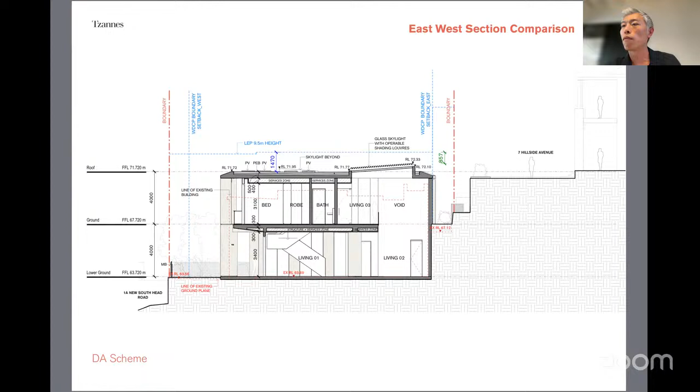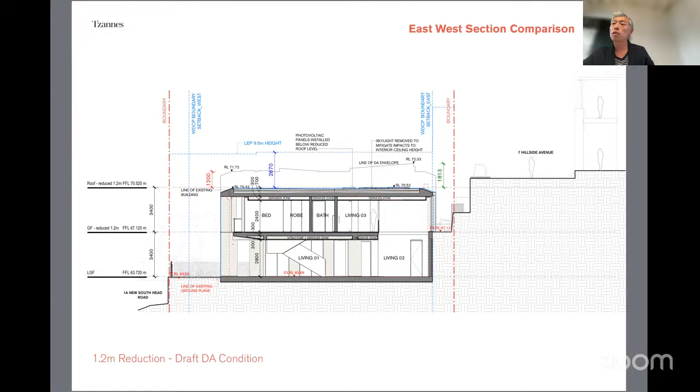I'll move on to the next section, which is the draft DA condition, reduces the height by 1200, also noting that this means reducing the skylight by 1800. We think this amenity reduction is unnecessary. It would compromise the quality of housing infrastructure, and adversely impact the overall quality and outcome of the architecture.

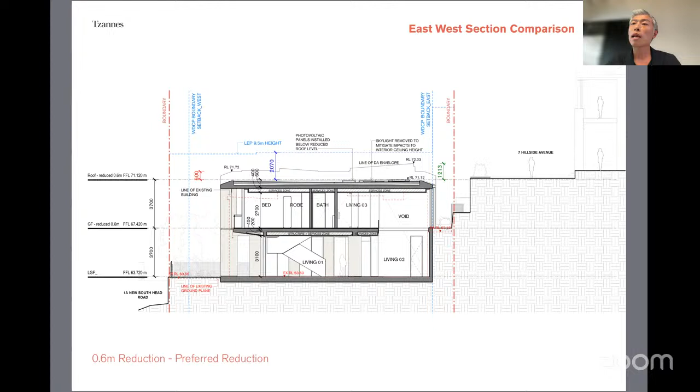So instead, we propose a more nuanced and balanced height reduction of 600 mil. This option will still be 2 meters under the LEP height. Here's a comparison starting from the LEP height, followed by the DA scheme 600 mil reduction in green, draft condition 1200 reduction in blue, then the existing in red.

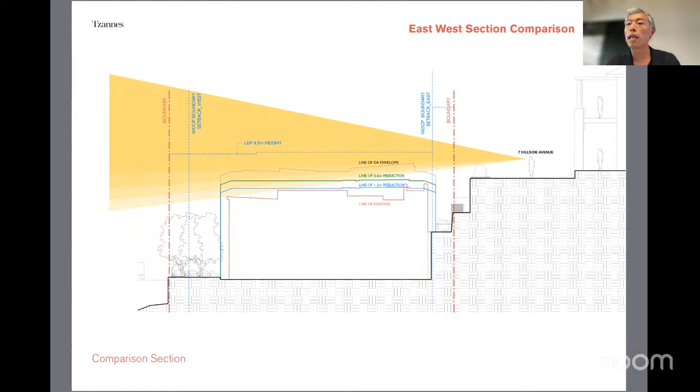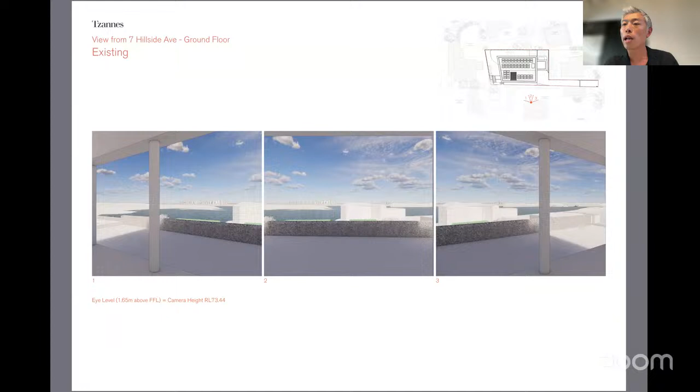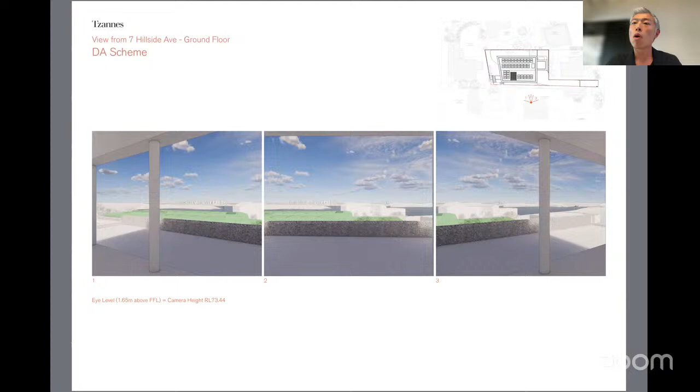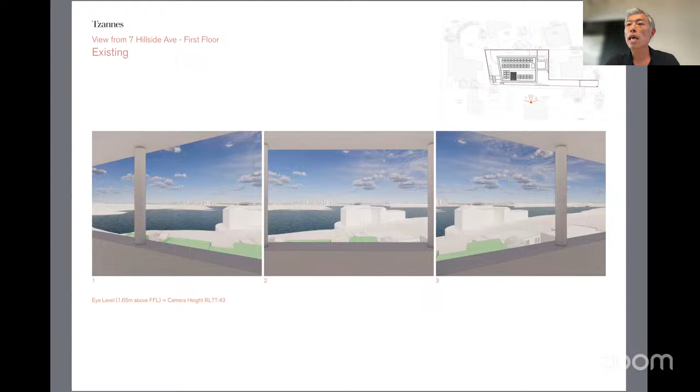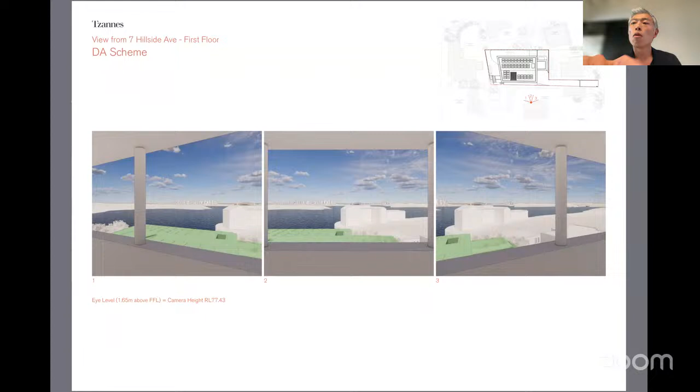We also did the same analysis standing on the first floor of number 7 Hillside Avenue, again existing, followed by the DCP LEP envelope, then the DA scheme, 1.2 meter reduction, and 600 mil reduction next.

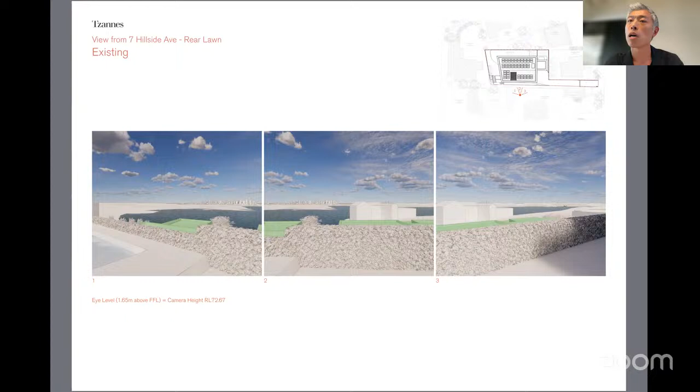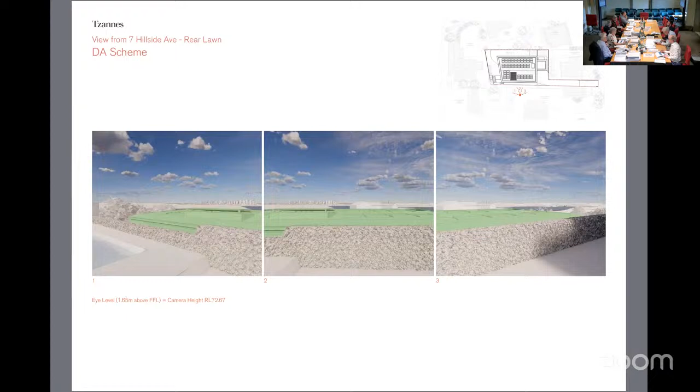And lastly, we also did an analysis standing on the rear lawn of number 7 Hillside Avenue, approximately matching the photo submitted as part of the objection. Again here we see the existing, followed by the LEP DCP envelope, then the DA scheme, 1.2 meter reduction, 600 mil reduction.

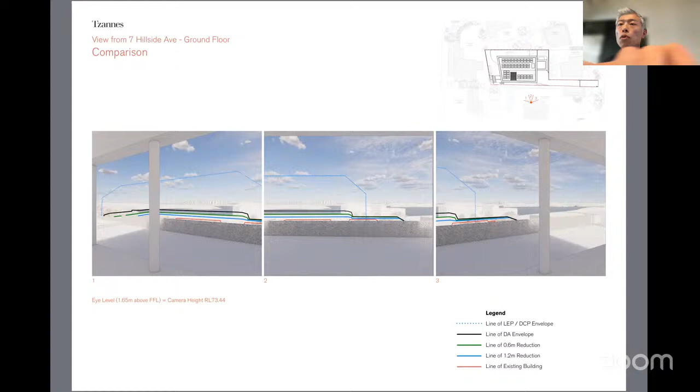Last but not least, these show the comparison of the varying height with the preferred 600 mil reduction shown in green. This is standing on the ground floor. This one is standing on level 1, number 7. And this one standing on the rear lawn.

So from our analysis and height study, the impacts of the DA scheme are primarily limited to the non-iconic views. The iconic CBD, Harbour Bridge, and wider breadth of the views remain available to number 7 Hillside Avenue, and impacts to these iconic views are limited. We consider our proposal to be a reasonable response to the site's condition, topography, and the views, with the architecture being appropriate for a house of this scale in this location.

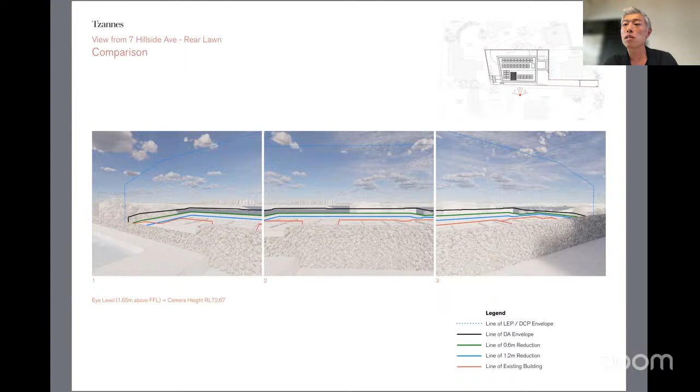So in conclusion, based on the view analysis and height study presented, we request the panel revisit the 1200 reduction, which in reality is 1800 of the consent condition, and consider a more nuanced and balanced reduction of 600 mil. Thank you.